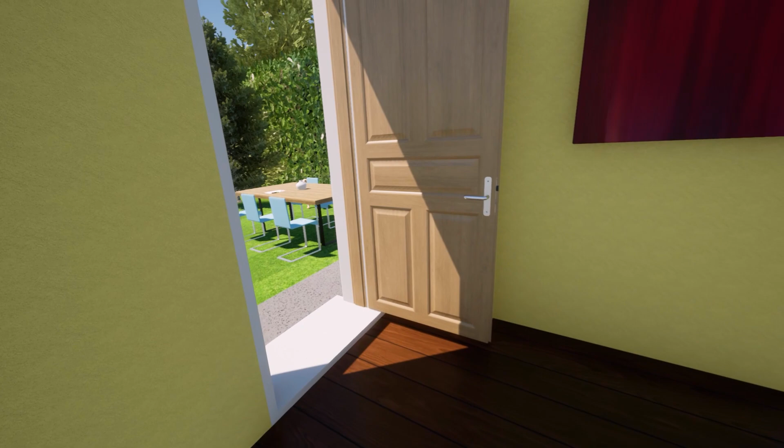Welcome to my step-by-step guide to installing an Oase gravity-fed drum filter. An automatic filter that flushes itself clean and requires only a moderate amount of maintenance. If installed correctly, a drum is arguably the most efficient and easy to maintain koi pond filter.

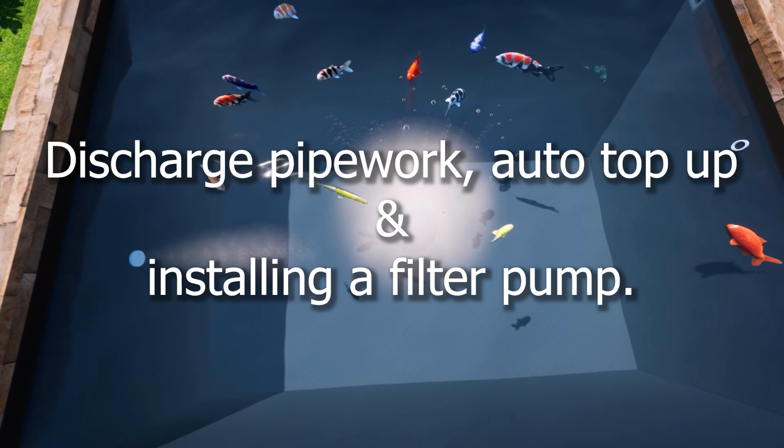In this series of videos, I will explain how to connect your drum to an aerated bottom drain, fit a simple water auto top-up with built-in overflow, and pipe in your pump, UV and skimmer.

Even if you're not opting for a drum system, there is a huge amount of extra information you will want to know before you construct your pond. So get sat down with a coffee and let me show you how I would go about installing one of these amazing filters.

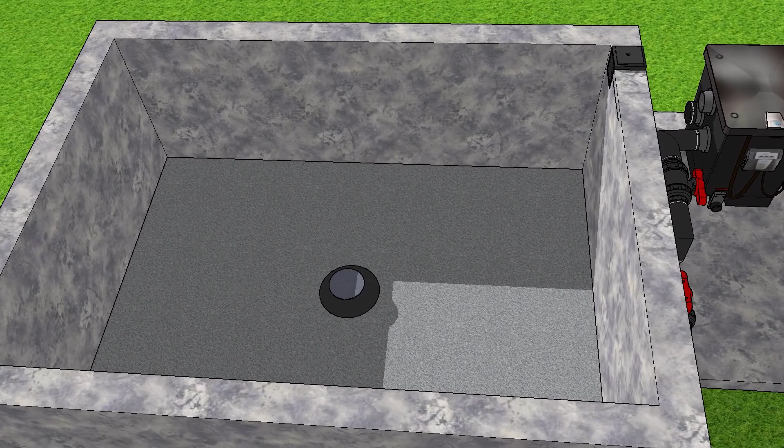Hi there, welcome to part 3 of my step-by-step guide to installing a gravity-fed drum filter. Please make sure that you watch these videos in order, otherwise they won't make a lot of sense. In this video, we're going to be connecting up some pipework and I'm going to explain how you can make a super simple auto top-up with a built-in overflow. After that, we'll discuss pumps.

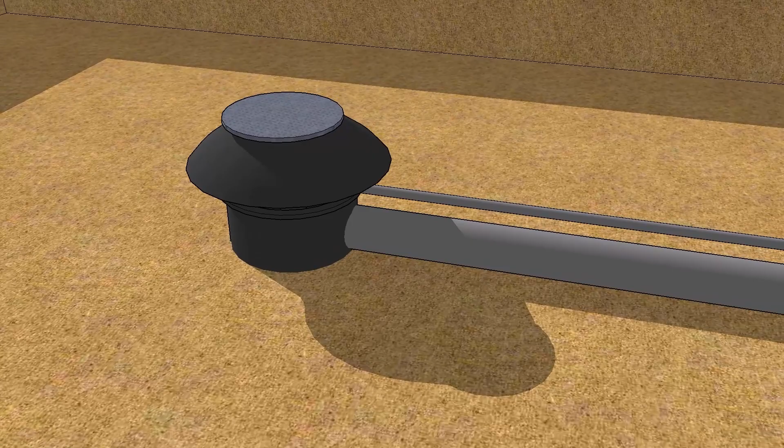In previous videos, I introduced drum filters, explained how to build up a pond with a drain and skimmer. Then we took a good look at the Oase ProfiClear Compact M and finally connected it onto our bottom drain pipework.

One of the greatest challenges that a pond builder will face when they're constructing a koi pond is wastewater management. Drum filters are self-cleaning systems that regularly discharge soiled water to waste. It's important that we've got a plan in place for handling the wastewater. This will usually mean running water to a drain or soak away system.

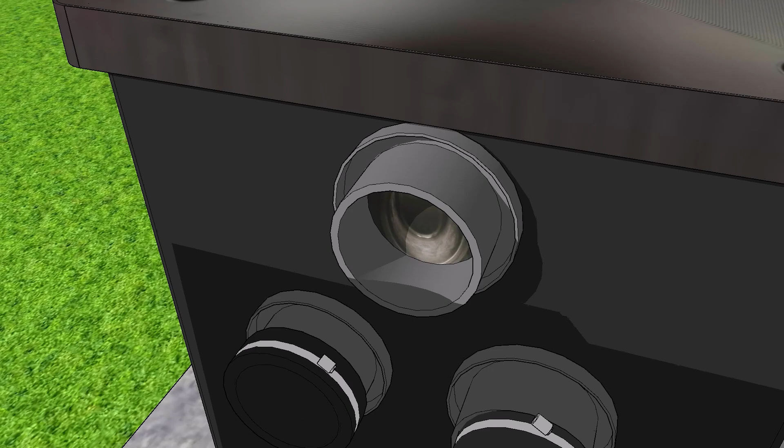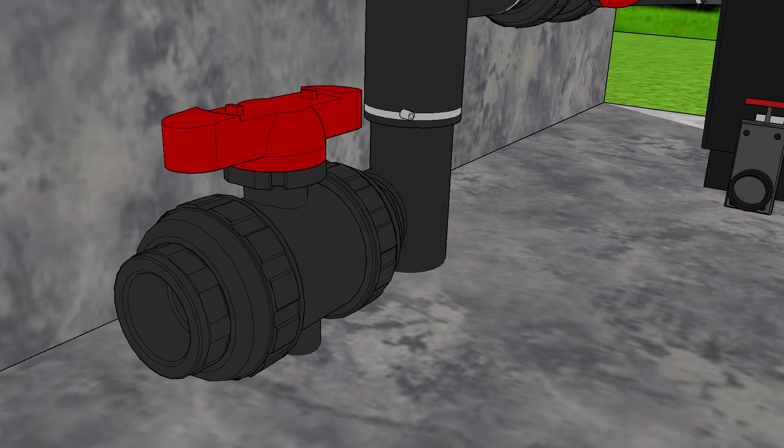Water will be discharged from the dirty water connector on the front of the drum and also from the service valve that is located on the side of the filter. On this system, we have a bottom drain purge valve and water from here will be sent directly to waste. So what I'm going to recommend is that all these three outlets are merged into one pipe that will eventually discharge into the drain system.

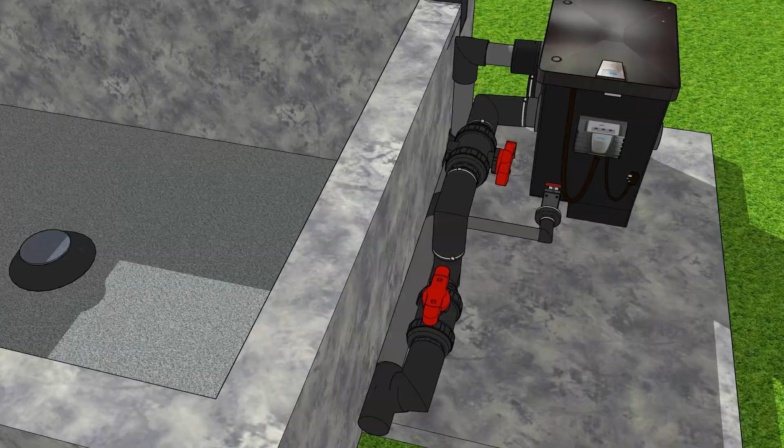The dirty water connector is 110 mm and a rubber boot fitting can be used to connect this to your pipework. When the filter is discharging water, it does not come gushing out here at speed. Only about 1 litre of soiled water will exit here, but it might complete 50 cycles a day, so this amount will eventually add up to a significant quantity.

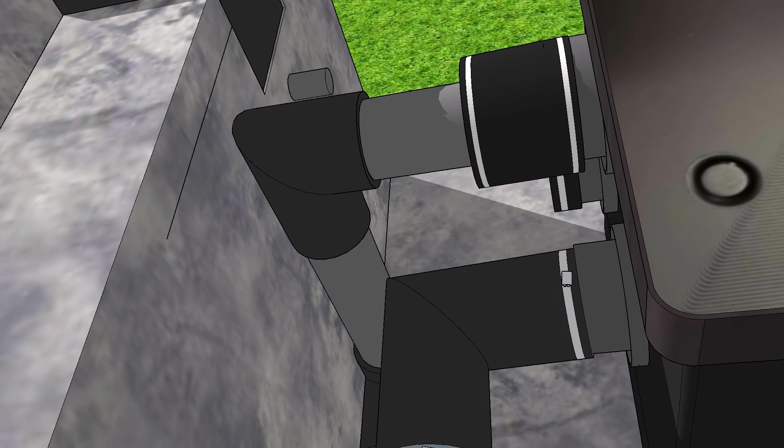Oase recommends that you use a large diameter discharge. This is unlikely to become blocked up with leaves and blanket weed and so on. Rubber boots are brilliant because they're simple to install and they're quick to remove. If ever you need to move the filter, it's going to be much easier if you haven't solvent welded everything together.

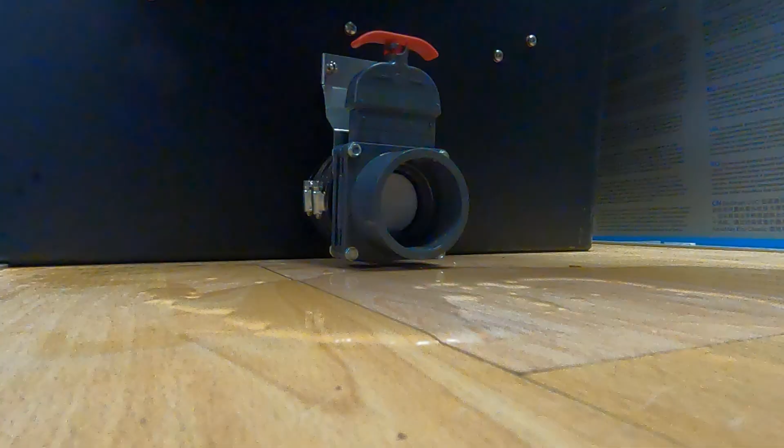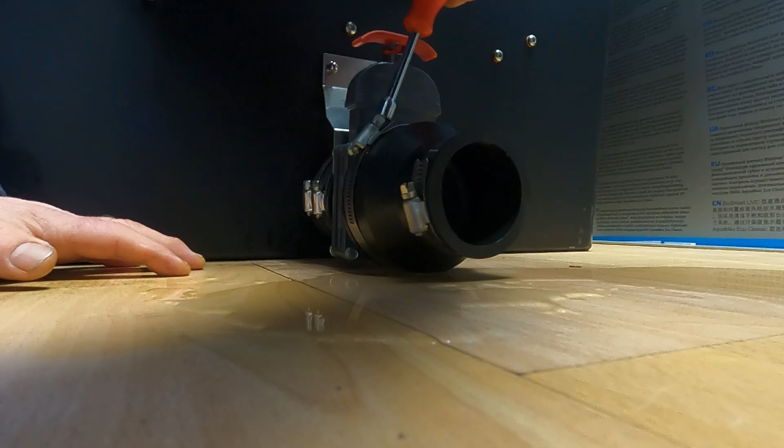The service drain is used when you're emptying the drum chamber. Oase's 70mm fitting will go over the top, but nobody uses 70mm pipe and it will not be compatible with the rest of the drain system. Now I suggest that you use a rubber boot fitting here. A 3-inch to 2-inch one is perfect.

The pipes need to be merged together into one via a reducing T. The pipe coming from our drain purge has to be maintained at 110 mm. That way it allows a good flush of water direct to waste.

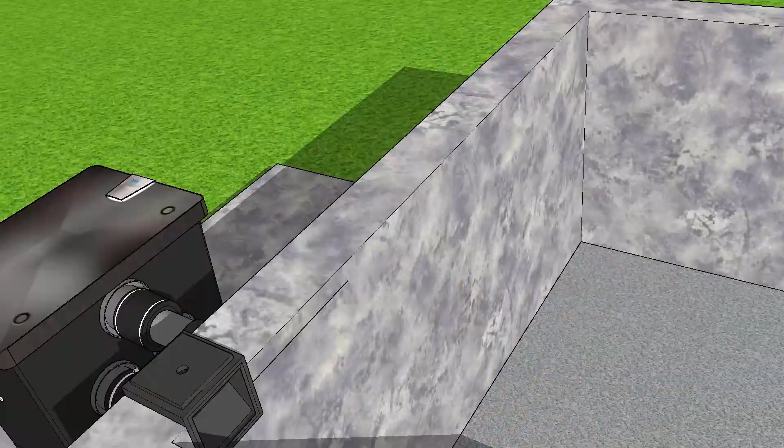Now my suggestion is to install a balance tank. It will have a permanent water feed controlled with a good old-fashioned ballcock valve. And while we're at it, we might as well fit an overflow as well that will allow surplus water from rain to run straight to waste. Purchase a small header tank from Screwfix or Toolstation. They are not expensive. A 4-gallon one will be perfect.

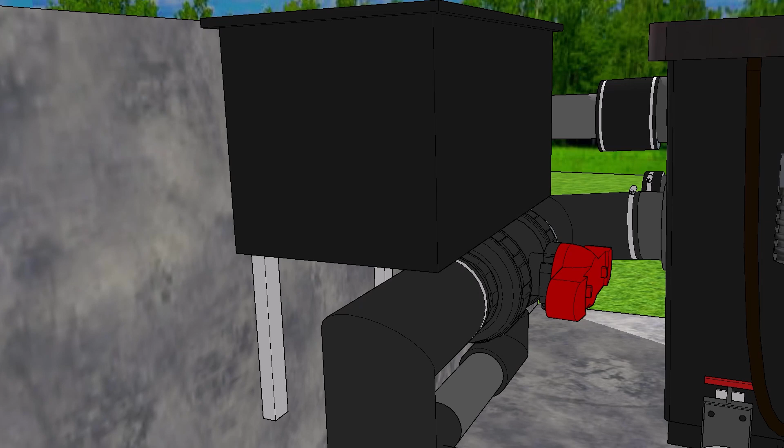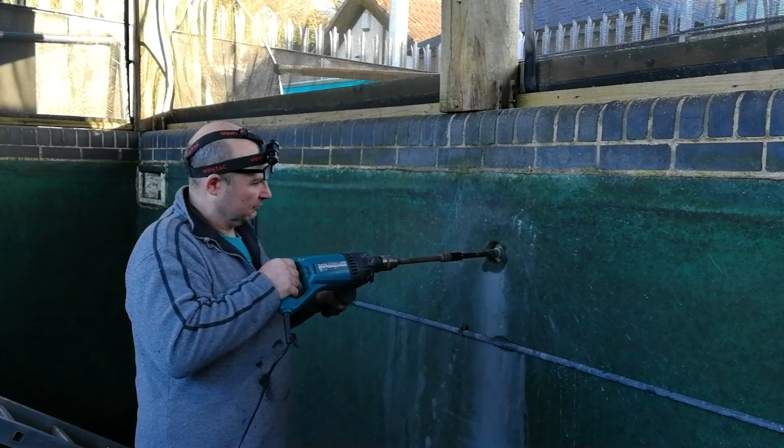The tank needs to be positioned at the side of the pond. Some strong metal brackets can be used to support it, or you might decide to use some brickwork. The tank will be connected to the pond with a section of pipe and 2 tank connectors. If you need to drill through the concrete, then a diamond core drill is ideal, and you can hire them now really cheaply. Otherwise, build them into the pond when you're constructing the walls.

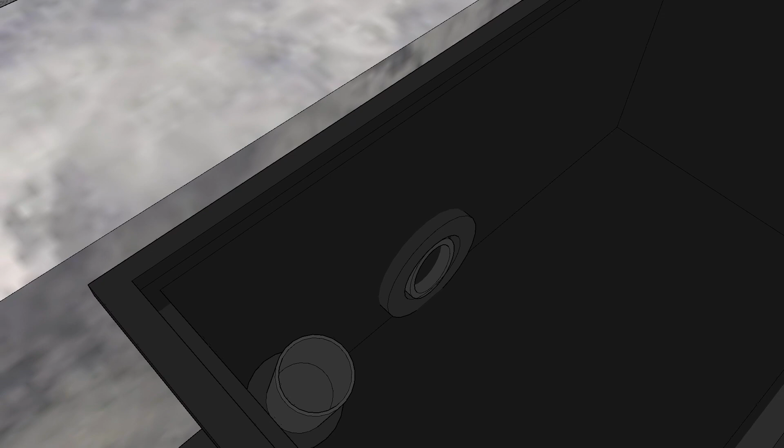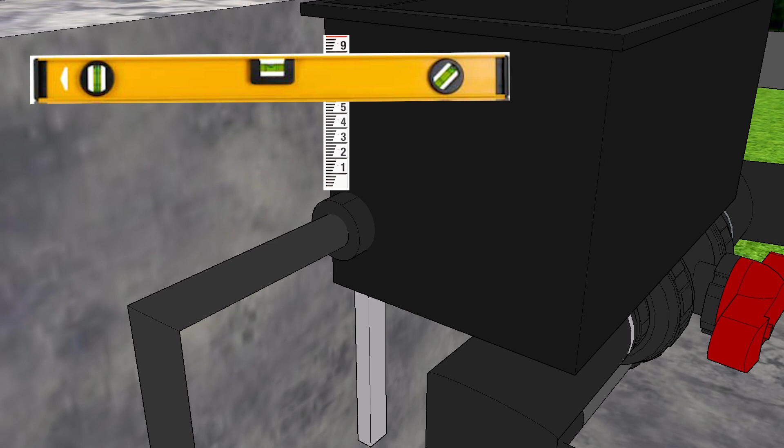The tank has to be level with the top of your pond wall. The connecting hole through to the pond should be much lower down than your desired water level. In the side of the header tank, we're going to create an overflow. This again needs to be well down below your desired water level. This hole is not going to set the water level. A 90-degree bend and a short upstand pipe will set the desired water level.

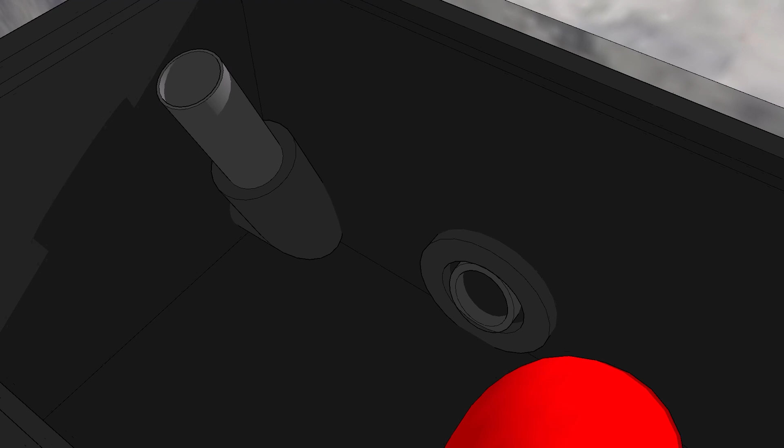On the opposite side of the tank at the top, we fit a ballcock. You can get a cheap 15mm isolator, and that's going to be useful should you ever need to shut off water to the valve. For peace of mind, the ballcock should be fed with mains water that's been through a dechlorinator. Now connect up the pipe from the overflow into the main water discharge. We have all of our wastewater now going neatly into one 110mm pipe.

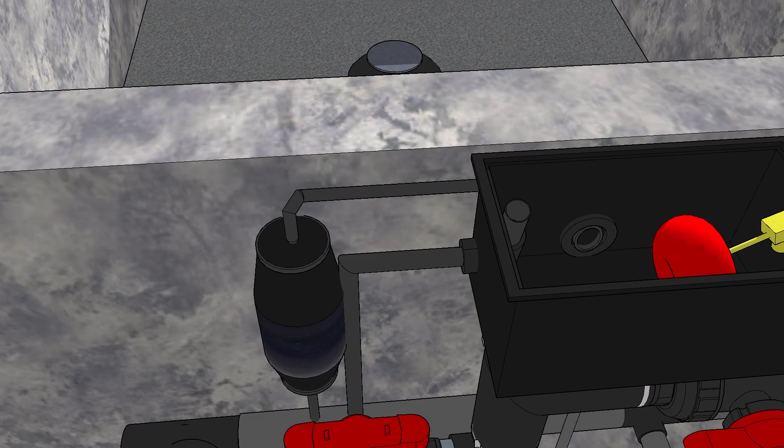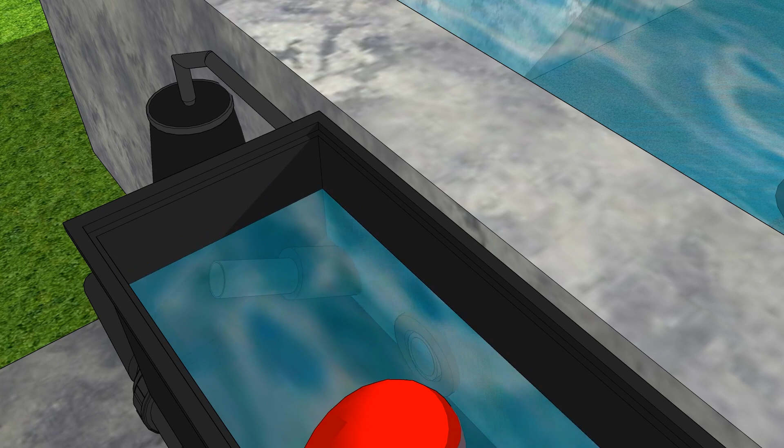This setup with the balance tank is really cheap and simple to do. It's definitely worth installing. The overflow can easily be adjusted by rotating the 90 or shortening the upright pipe. It works brilliantly, and you can set that water level in your pond to the millimeter, and you can adjust it as often as you like.

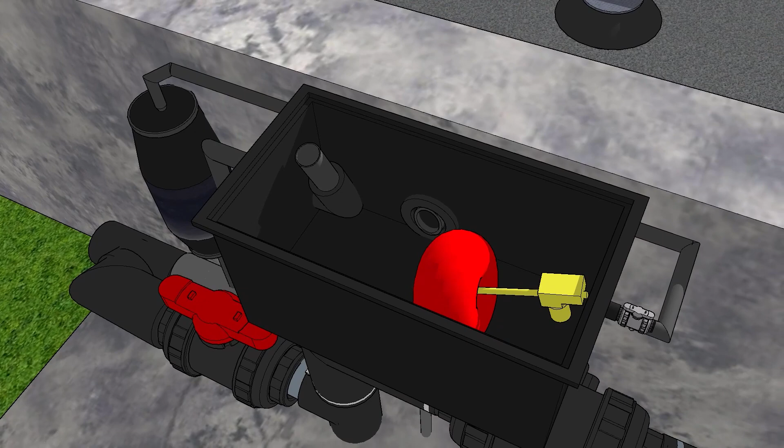I much prefer the balance tank method as opposed to fitting a ballcock in the filter, or worse still, directly in the pond. If you want to do a trickle in and trickle out system, this is going to do that as well. It does it better and more simply than any other way I have ever come across. For me, this balance tank method ticks every box.

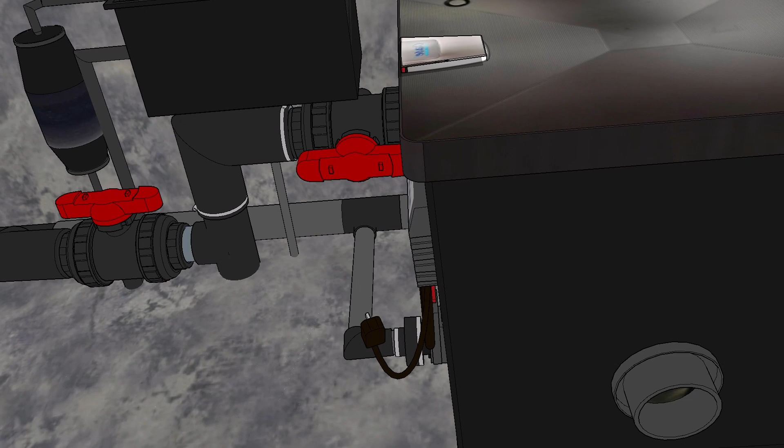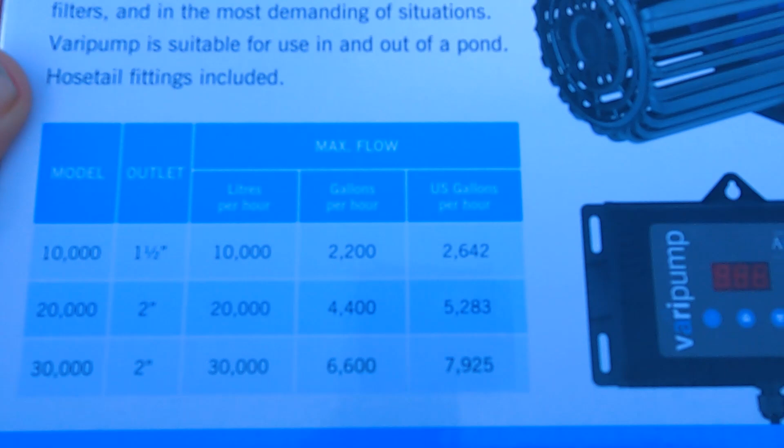To set up a water flow through the filter, we need a pump. The pump will draw water from the filter and push it back over to the pond. The best style of pump is a dry mount. That means that it stands out at the side of the filter as opposed to submerged directly in the water. In the past, few options were available to the pond keeper, and swimming pool pumps were often used for this application, but they were bulky, noisy, and expensive to run.

Things have changed a lot, and you can now purchase some very good value for money pumps that are reliable, cheap to run, and compact. How big a pump do you need? In the old days, you would often hear people say, get a pump that turns over half your pond volume through the filter per hour. Now, I never really subscribed to this idea. It wasn't based on anything scientific.

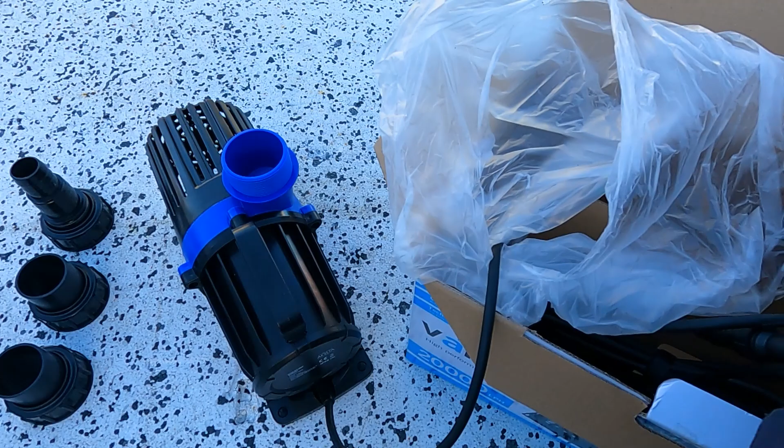And I have always suggested getting a larger pump that will keep the water moving, maintain a good oxygen level for the fish, and pull more solids into the bottom drain. The truth is that nobody knows exactly how big the pump should be. So what I recommend is a variable speed pump. A few years ago, this type of pump was so expensive to buy that I could never bring myself to suggest them.

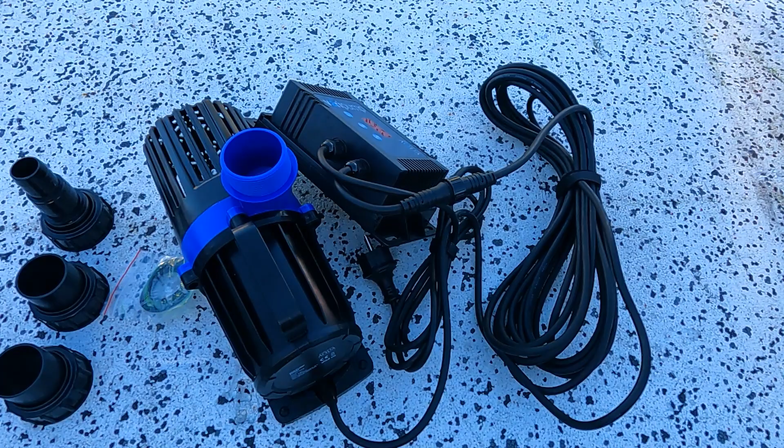But recently, the price has dropped a lot, and now they've started to make sense. They make a lot of sense. When you turn these things down, the power consumption will also be reduced, and that means that you can save money on electric bills. One of my favourite pumps is the variable speed Evolution Aqua pump.

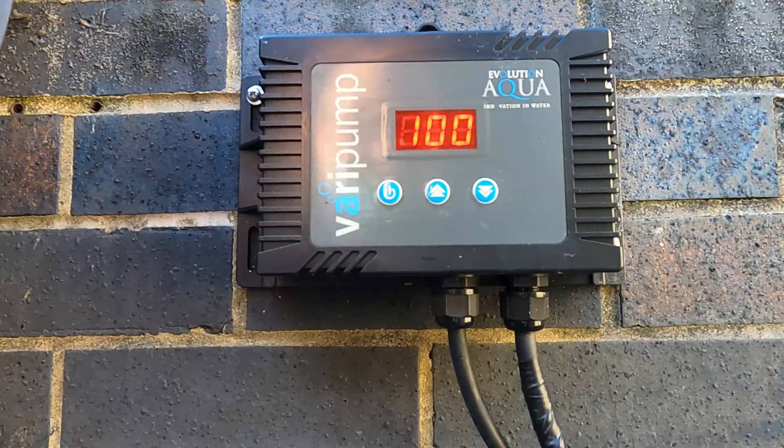It's available in 3 different sizes. The pump is shipped with this sturdy control panel. The controls are super simple, and there's a readout on the front that shows you the wattage draw. You can speed up or slow down the pump to perfectly dial in the required flow. This pump is waterproof. It's actually rated for submersible application, so exposure to the elements will not be a problem at all.

To connect your pump to the pipework, you need to install a pair of break unions. They give you the ability to remove the pump quickly for maintenance purposes. If your unions are supplied with rubber sealing gaskets, make sure that you use them. Never weld the fittings on. Don't glue them on with polyurethane such as Gold Label. You'll never get them off.

Instead, wrap the threads with a generous amount of plumber's tape, or use aquarium silicone to make the threads watertight. Silicone can look messy and unprofessional, but it's very easy to apply and it never leaks. You can always separate the threads if you've used aquarium silicone. Now let's take a look at how the pump gets connected to the system.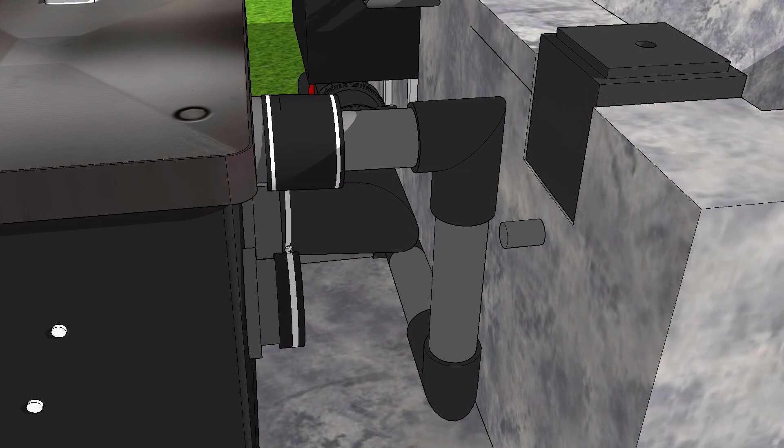The pump is going to draw water from our filter and from our skimmer. So a pipe needs to be run round from the skimmer outlet to a T-piece. The second pipe is connected to the outlet coming from the filter. A reducing rubber boot fitting is perfect for this job. This pipe joins into a T-section, and the pump is connected to the T.

Notice that valves must be installed on each pipe. The valves are there to control and balance the water flow. They're also needed in the event that you need to remove the pump. You can close them both and you'll be able to detach the pump without the pond needing to be drained down.

Ball valves or slide valves are both fine for this job. Whilst ball valves are definitely more robust and reliable, for this job they're going to make very little difference. Sometimes slide valves will fit better.

I know that a lot of people are going to be wondering why I don't connect the skimmer pipe directly into the filter. After all, it would be easy to just run a pipe across from here. There is a connector on the filter to do exactly that. And if you want to do this, then that is an option.

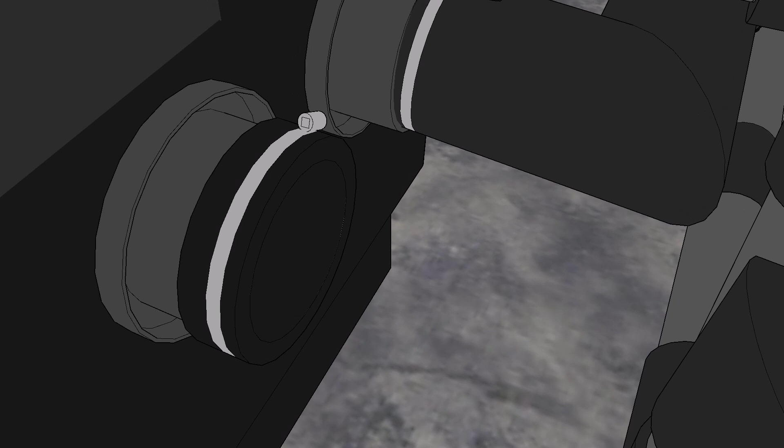But by connecting my pump directly to the skimmer, I can pull a lot more water through the skimmer. Even 5,000 litres per hour, perhaps a lot more. It ensures that you get a good pull on the skimmer. It also means that I can pull the maximum amount of available water from the bottom drain. It has no choice but to come from the bottom drain.

Some people have modified the skimmer units to take a larger diameter pipe, such as 110mm. But why? I just don't understand. Inside the skimmer there is a basket that filters out large floating debris, food, etc. and it holds it until you come along and empty them out. You do not need to filter the water that is coming from the skimmer. Let the bottom drain do more work.

So that's it for this video. In the next one, I'm going to be showing you how to connect up your UV and pond returns.